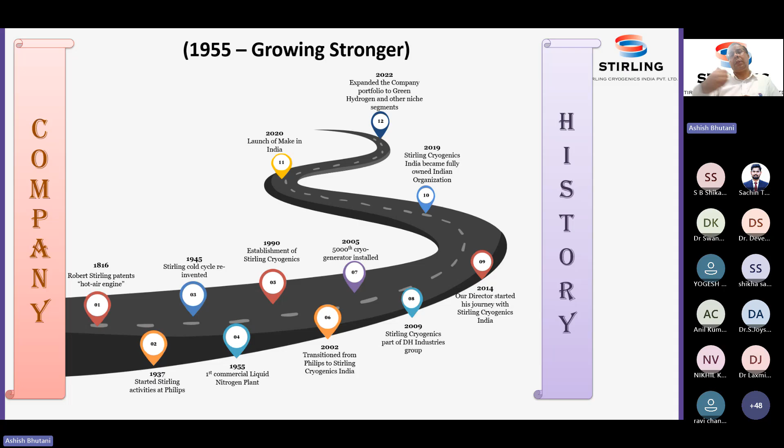Recently, Mr. Nitin Gadkari drove his first hydrogen-driven car, known as Toyota Mirai, and that very storage container was developed and fabricated by us and our principal company. That is the thing which we are proudly doing. India is still to experience a lot of transformational gear towards hydrogen, and we are at the forefront of that.

This is our one slide showing that we have 70 plus years of global legacy. We have installed more than 700 systems all over India, and we are a Make in India company - the first company that adopted this Make in India concept when it was launched in 2020.

So allow me to run a small video about Stirling.

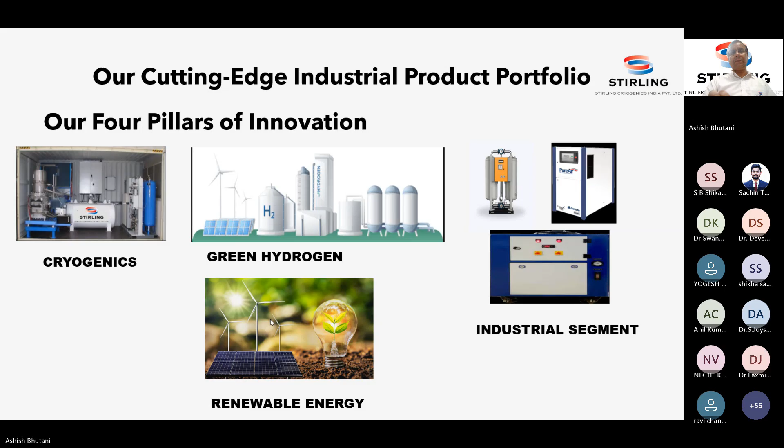So if I move on, we have a collaboration with Fabrum, which is a New Zealand-based company started in 2004. Fabrum is also a very, very decent company to work with. We were the first company to handshake when the launch of Make in India was announced, which I'm going to share in my presentation. Allow me to run a brief video on Fabrum.

Screen is visible, video is okay. The screen is visible, sir, but we can't hear the audio. Audio is not there. So can I do something with the internet?

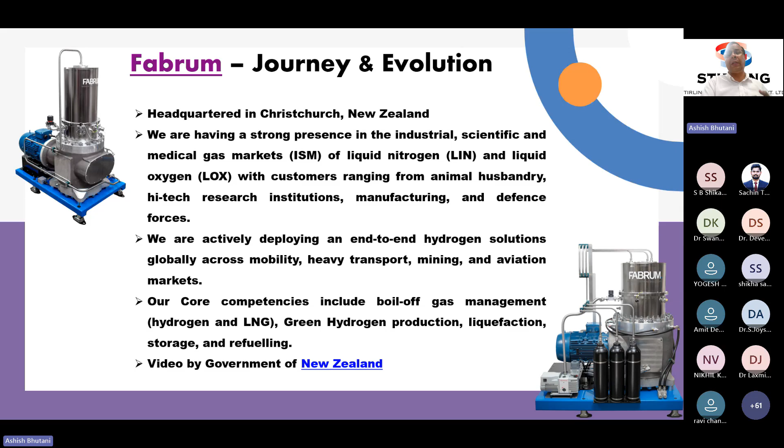Fabrum is a 21-year experienced company, and we hold a patent around our cryogenic solution. This is the only organization in the world with a dual patent on cryogenic technology and green hydrogen solutions. Our key shareholders are Fortescue, K1W1, Obayashi, and AP Ventures.

Fortescue is a big company in Australia. Their vision is that by 2030 their entire fleet of mining trucks will be converted from diesel to green hydrogen. We are actively working on that, and in fact we have put up a couple of projects with them in Australia, where we provided the concept-to-commissioning solution.

So that is what we do. And Fortescue, if I tell you in an Indian perspective, they are the Ambanis of Australia.

So this is our core competencies. We are into cryocooler, like liquid hydrogen, liquid oxygen, boil off gas management, electrolyzers, biomethane, and liquid nitrogen. So that is our cryocooler competencies we do have.

And in composites, we are into aviation, for which we have developed these kind of special containers for aviation sector. We are into heavy transport. So this is the real photograph of the project we put up in Christmas Creek in Australia, and then magnetic and superconducting applications, custom based.

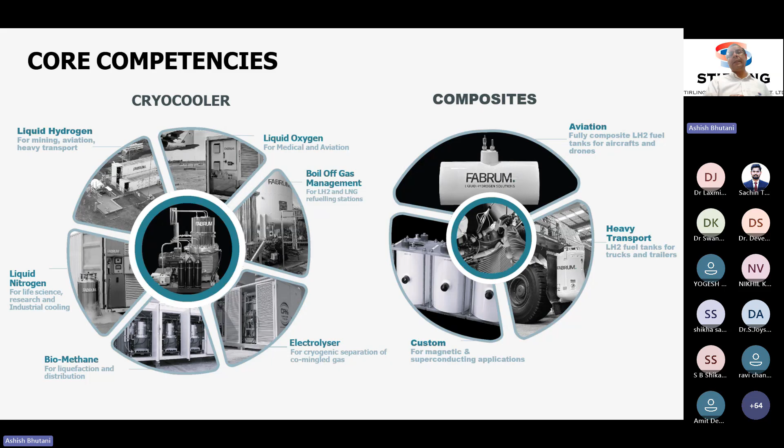So these are our main functional divisions: liquid nitrogen, liquid oxygen, liquid hydrogen, boil off gas management. Boil off gas management is also a new niche segment wherein we are putting up the project, liquefying the gas which is coming out and reducing the losses. It's basically a zero loss system.

In hydrogen refueling, we have developed 1 megawatt and 5 megawatt fuel stations. We have put up 5 projects in Australia so far.

And composites, so this is a liquid hydrogen storage, and this is a real photograph of our technical director who has actually held the hydrogen storage container in his own hand. So we have developed a very lightweight hydrogen storage container that can be used for aviation and other sectors.

So our vision and mission is very clear: we would like to be a world-class manufacturer and service provider, and we would like to be a one-stop solution for industrial and green hydrogen requirements. And mission-wise, this is what we have been doing for the last 70 years.

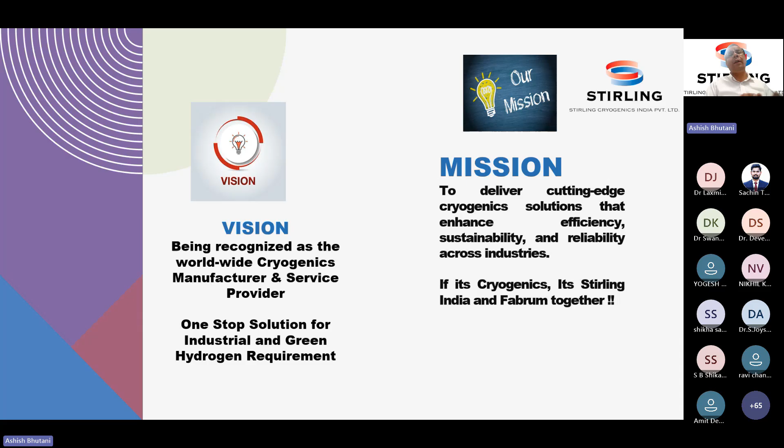If it's cryogenic, the first name that should come to mind should be Stirling India and Fabrum. So that is our mission and vision, and myself along with my entire team, we work day and night to make sure that our vision and mission is absolutely ensured.

So cryogenic solutions - our solutions go into animal husbandry. We have more than 50% of our customer base in all of India's animal husbandries.

You name any IIT, you name any NIT, we do have presence over there. State universities, central universities are our main clients, along with medical line, pharma, IVF centers, and research labs. So our cryogenic solutions go very well into these critical sectors.

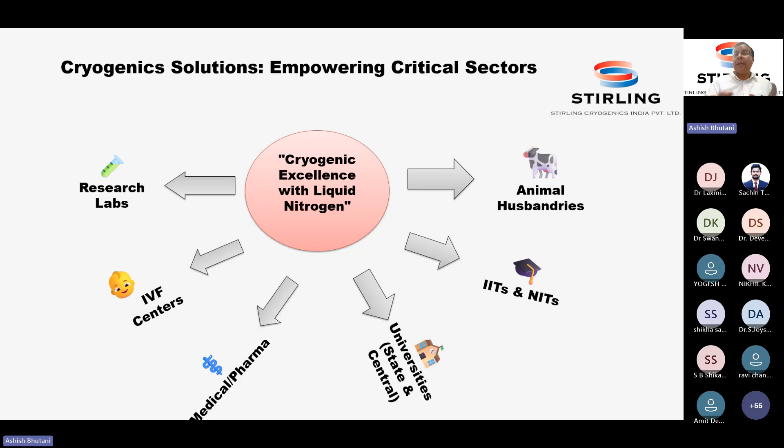And this is our product range. We are into small to mid-range products. We are developing a 1.5 liter per hour machine for which Mr.

Rahul Rangar, who is our R&D head, along with Simran Chauhan, who is also in R&D, they are working day and night to make sure this product is launched by December 2025, the new year. That product we are developing indigenously on the GM cycle, Gifford McMahon cycle, ranging from 1.5 liters per hour to 100 liters per hour.

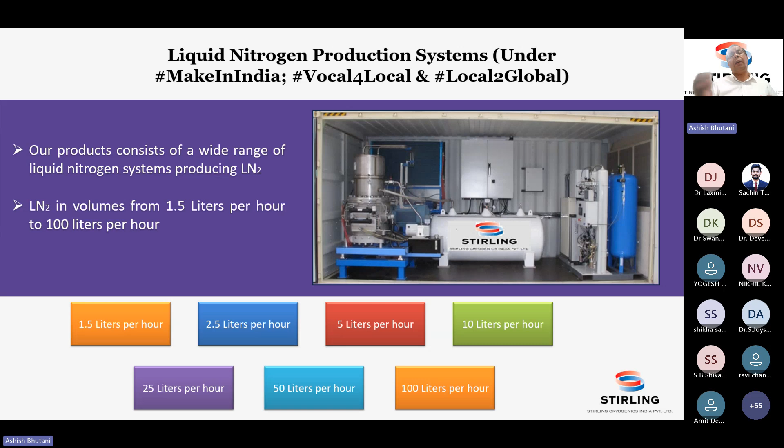That is our main customer and product range. So we have almost 750 plus plants all over India.

So this is the change we experienced way back in 2020, when the Honorable Prime Minister Modi ji launched Make in India, Vocal for Local, and Local to Global.

So we have all these air compressors, the receivers, the PSA, the voltage stabilizer, and the chillers, and the entire gas part developed by Stirling India. And with Fabrum, we have the cryocooler and panel. So these two components are getting manufactured.

So our discussions are underway with Fabrum about why not manufacture the entire system over here in India. So very soon, within the next 1 year, we will have that kind of setup in the factory wherein we will manufacture the entire system over here in India, and that is going to be a breakthrough journey in the history of cryogenics.

And these are the standards which we follow. We are 9001:2015 quality management system, 14001:2015, and 45001:2018. And we are CE certified. We are a Udyam company, and we are also registered with ZED, zero effect zero defect, which is a bronze category.

That is honored by the Ministry of Small and Medium Enterprises. So we follow the highest standard. We do not encourage or have any kind of system which doesn't work. We do rigorous R&D and rigorous testing before dispatching the system to any client.

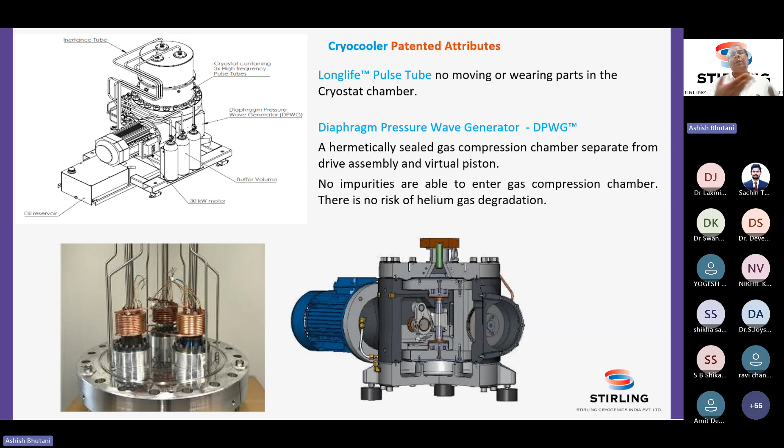By virtue of that, since there is no moving component, this has relatively longer life and higher reliability. That is what we proudly say. Once you have our product, for the next 10,000 or 12,000 hours the machine runs continuously, so you do not require any maintenance. After about 10 to 12,000 hours, only two filters need to be replaced, and the hydraulic oil in the oil reservoir needs to be replaced. This is the beauty of our technology, that is why we have written the patent, established the standard, and followed it.

This is the erstwhile technology, because I always believe continuous improvement is the life. We follow Kaizen. This was the third generation machine wherein the piston and compression took place in this compression space. Since we follow the Stirling cycle, we have similar technology, but we do not have the actual movement.

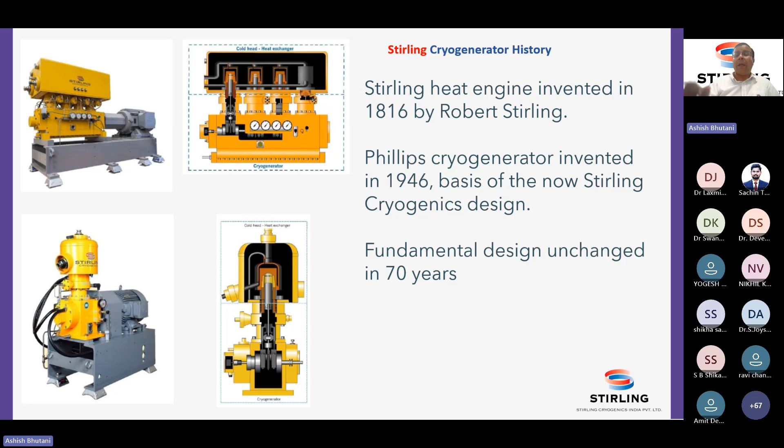We have virtual movement instead, through the diaphragm which we developed, giving longer and more reliable life to the system. So we changed it such that this machine used to need maintenance after about 6,000 hours, and now we do not require maintenance till 12,000 hours. Major maintenance used to happen at about 16,000 hours with this technology.

In this, we have experienced 40,000 hours. The patent states that major maintenance happens at about 40,000 hours. If I calculate in number of years, if the machine is installed today and running around the clock, say about 8,000 hours a year, then for the next 5 years we do not require major maintenance. That is what we have given.

When we actually tested, we tested this machine for 7 to 8 years before launching into the market. We experienced that this diaphragm has actually crossed more than 50,000 hours without failure. That is why we have been honored with these two patents.

These are the preventive maintenance schedules which we follow. The major strength of our company is the after sales service support, and we proudly take on longer warranty because we know our product and we know our team. After completion of warranty, we also enter into a long-term service contract, 3 years, 5 years, or even 10 years. Our service engineers are very well trained.

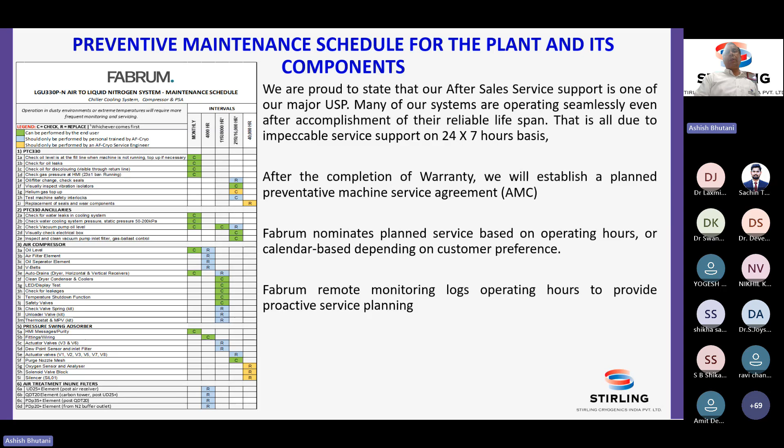Coming back, these are the projects. I have not highlighted the entire 700 plus systems. I have specifically stressed those projects which we executed after the launch of Make in India. I'm really proud and glad to work with this company, as we were the first company awarded with a product project when Make in India was launched back in 2014. So I've specifically chosen these projects which will give a lot of insight about us.

This is a project which we installed in Kargil at minus 20 degrees Celsius temperature, in Pasighat, which is about 100 kilometers from the China border, and in Ujjain. If any of you visit Ujjain next time, kindly visit our plant also, which is about 3 to 4 kilometers before the Mahakalji temple.

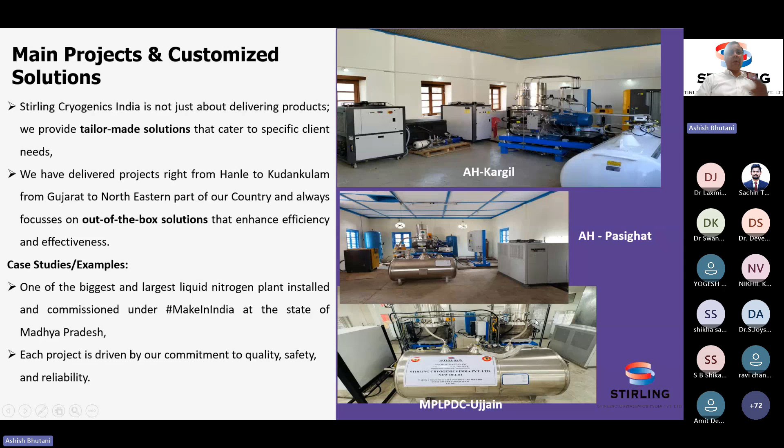This is one of the biggest projects in the entire MP, catering to the liquid nitrogen requirement till Indore. There are about seven major stations and 120 substations where this liquid nitrogen plant is fulfilling the entire requirement. This was the first project at Rajmata Vijayaraje Scindia Krishi Vishwavidyalaya, Gwalior.

The entire management was very elated and felicitated us. This was the first project in the history of cryogenics where we manufactured the system here in India, and we are still the class one supplier. From that day on, we have never looked back. We have got a couple of projects through tendering, but we always get success.

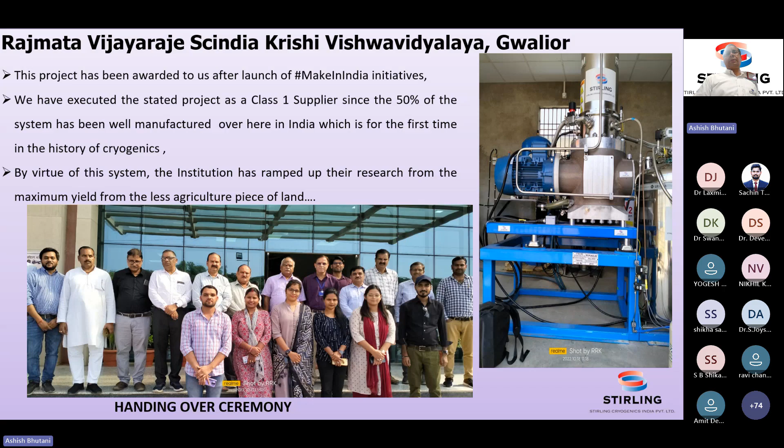This is the second project which we put up in Kargil at minus 20 degrees Celsius. This very project was published in their coffee table book when Ladakh was declared as one of the UTs, which was earlier part of Jammu and Kashmir. This plant gives about 600 liters per day production.

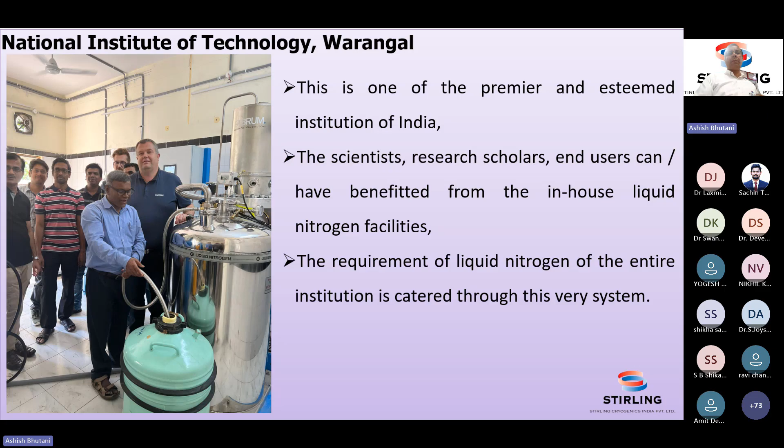That was the third project which we did in NIT Warangal. These gentlemen come over here and our team also works with them, showcasing the united spirit. This is one of the biggest projects in the entire MP, inaugurated by Honorable Chief Minister Dr. Mohan Yadav ji, installed in Mahakal, a prominent tourist place.

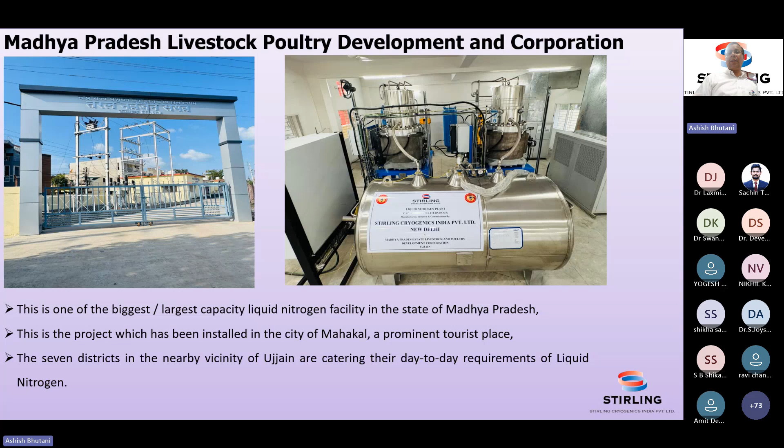This was the project we put up in Pasighat, Arunachal Pradesh, about 100 kilometers before the China border. And NIT Rourkela is what we recently put up.

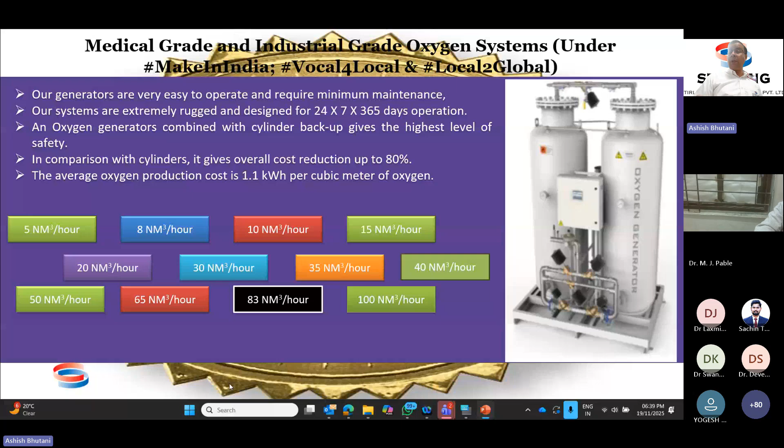These are the products for hospitals which we manufacture here in Noida. I invite all of you to visit us and visit our factory. We have products from 20 bedded hospitals to 400 bedded hospitals. And these are the industrial projects like Compair, Gardner Denver, Parker, and Vichy, which we represent on a pan-India basis.

This is mainly the topic of today, green hydrogen. The future is this, because all of us are experiencing that fossil fuels are getting depleted day by day, and the prices of petrol and diesel are increasing day by day. So the alternative solution has to be developed. That is what we are proudly doing, a lot of R&D, a lot of research, a lot of innovations, and also launching many solutions towards this green hydrogen.

All of us know there are three types of hydrogen: gray hydrogen, blue, and green. Why do we say green? Because first and foremost, our entire system operates on renewable energy. We do not use any fossil fuel or natural gas, biomethane, or anything. That is why we proudly say we produce a green hydrogen, which is basically depleting carbon content and giving carbon credit. We remove the carbon content and also produce a very clean hydrogen gas and liquefy it. That is what the future is - into transportation, chemical industries, energy and storage, and liquefaction and export.

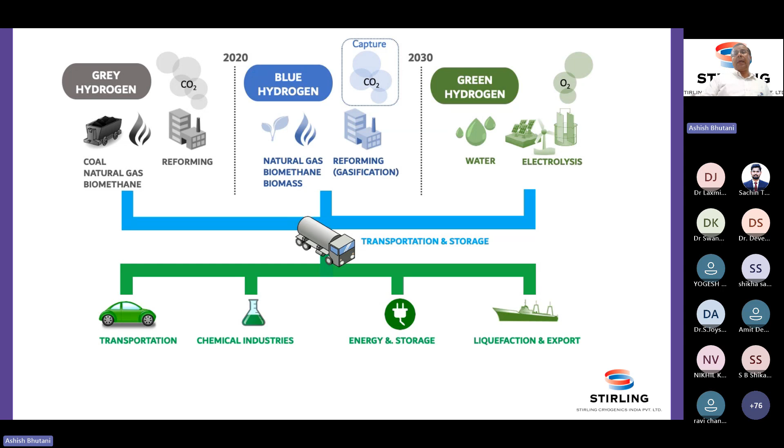All of us know we are students, and at the age of seventh or eighth class we have done a lot of practicals, wherein in one beaker or glass of water we put one cathode and one anode, and we could see with our naked eyes that the ions are getting dissociated. This is the same principle of operation which we do, but on a different scale - that was a very small scale, but now we do it on a larger scale. We have two technologies: one is proton exchange membrane, and second is membrane-free electrolysis. Proton exchange membrane technology is also good, but that is good for a smaller scale.

If I have to produce say 100 milliliter per minute to 1.35 liter per minute of green hydrogen, of liquid hydrogen, that scale is good for PEM.

That is basically proton exchange membrane, wherein there are cells which give positive polarity and negative polarity, whereas in the membrane-free electrolysis, which we have the patent also into, we are producing from 450 kg of green hydrogen to 900 kg of green hydrogen. So that is what, and these are the various R&D projects.

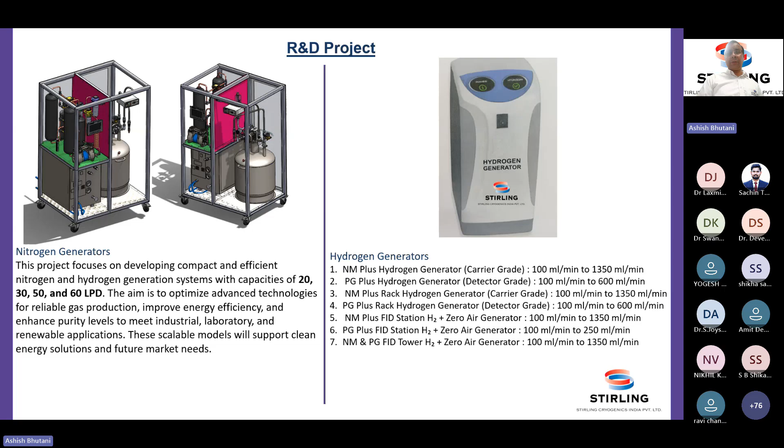And since we are all engineers, the difference between PEM and membrane-free electrolysis is very solid. First and foremost, in PEM technology, if I have to produce 450 kg of green hydrogen gas, I need 2000 parts per stack. However, in membrane-free electrolysis, I only require 400 parts per stack. So as the number of parts are less, the reliability of the system is more.

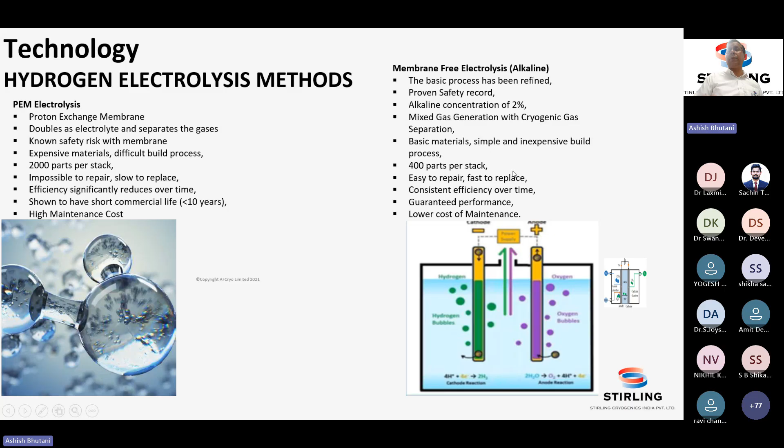The second major difference is that in PEM, we only use very clean water, distilled water and all, whereas in membrane-free electrolysis, we can use any sort of water, whether dirty or dusty or any kind, because that will be cleaned and the green hydrogen will be produced. So that is the major difference, and the cost of ownership of this system is comparatively less.

And we have two products, a 1.1 megawatt unit and a 2.2 megawatt unit. The major difference between them is only a double.

What we do is feed 4050 kg of water in a day, and out of that, 3600 kg of pure oxygen is produced, and 450 kg of green hydrogen is produced at a very high pressure, about 34 bar, and at a purity level of 99.9%.

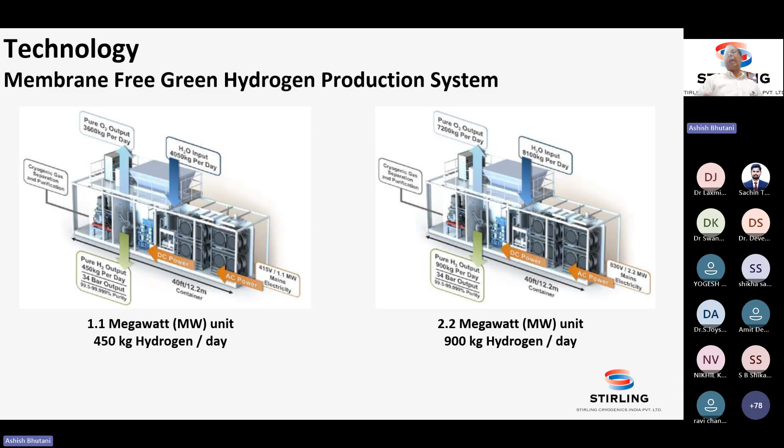Whereas in the 2.2 megawatt unit, we feed 8100 kg of water, and 7200 kg of oxygen and 900 kg of hydrogen is produced. All these systems are self-contained, into a 40 feet container, covering everything right from electrolysis, then production of hydrogen, and then liquefaction of hydrogen, all stacked into this 40 feet container.

This is the future—this is the project which we have put up in Christmas Creek, Australia, wherein we are converting all of their diesel trucks into green hydrogen driven trucks, and we have put up the electrolysis, then liquefier, then storage and all those things.

Storage of hydrogen is not an easy task. If it is not handled properly, it could turn into a hydrogen bomb as well. So what we have basically done with this technology is that every cryogenic container has to be double wall, insulated, self-insulated, with vacuum insulation in between. But in the case of hydrogen, to make sure our systems are reliable, consistent, and perform, we have developed a triple skin hydrogen container.

Even though it is triple skin—one layer, second layer, and third layer—the weight is not very high. It can be easily lifted on the lap.

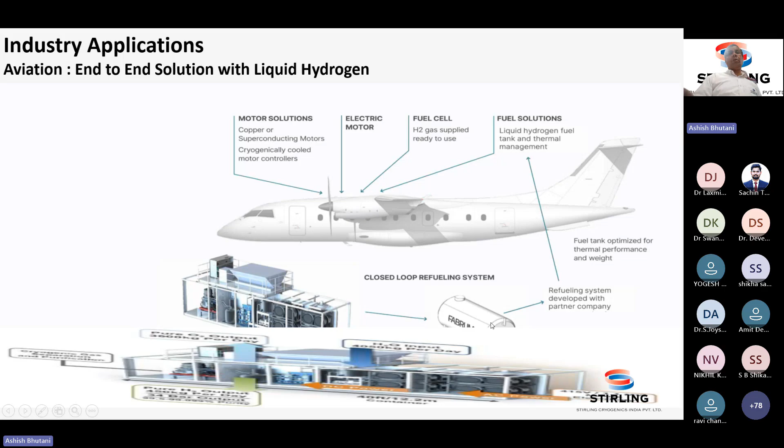And this is the real photograph for which we have done the project with the Australian Prime Minister—his private plane that is actually on green hydrogen, and for that we have given the solution. We have given the hydrogen storage solution to the Australian Prime Minister. And also into the chase boat.

Sorry, this slide is not...

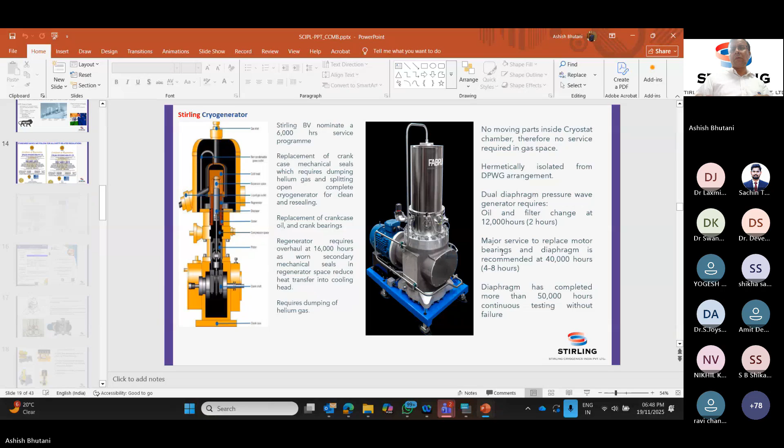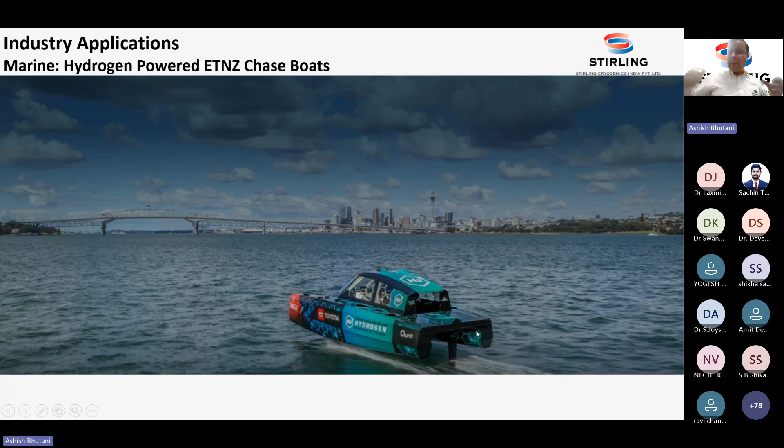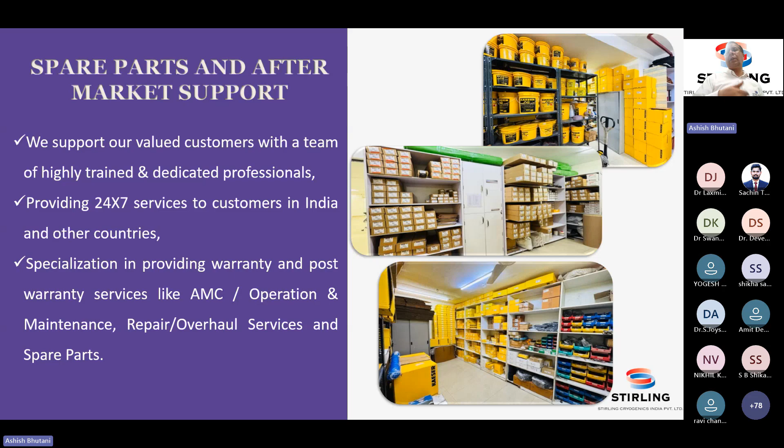So these are the spare parts and after-sales service. Since we also operate on a pan-India basis for various private customers, they need 24/7 support. So we have a fleet of spare parts available around the clock at our factory and at strategic locations within the country, so that our engineers can render the quickest possible service support.

So our idea is very clear: we want to expand market share, develop more solutions under the Make in India initiative, and focus on sustainability and green energy. We want to strengthen our after-sales service. I can always say that if we are getting back-to-back repeat orders, it's all because of the impeccable service support which we render.

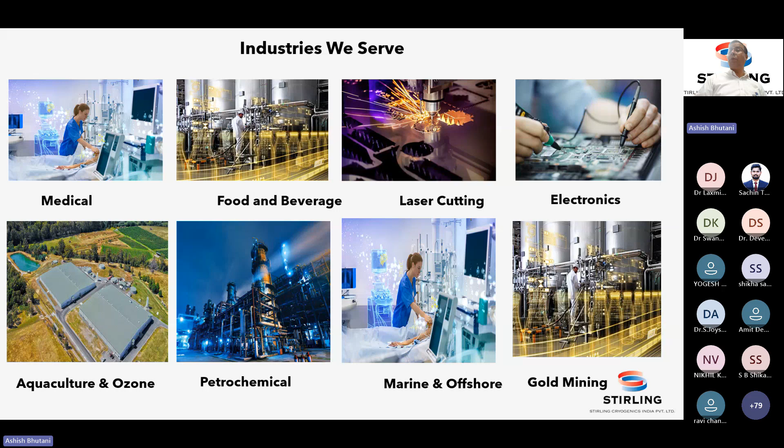So that's all about Sterling. Now I open the forum for the audience to ask any questions, please.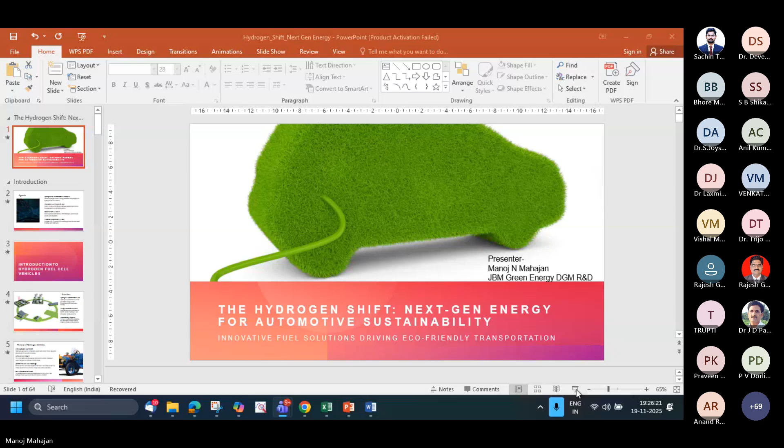Coming to the topic, the hydrogen shift, the next gen energy for automotive sustainability.

So today's agenda, what I will be more focusing on is hydrogen's role in automotive and its principles. We'll discuss hydrogen's role, how the energy transition has happened from fossil fuel to renewable energy, and basic principles of hydrogen fuel cell vehicles.

Then I will more focus on production and development cycle, because I think this week is complete for hydrogen's different topics. Some speakers will be more focusing on hydrogen's production process, and some might have already spoken on its storage and safety. So my focus will be on hydrogen, how it is playing a role in automotive and how the automotive industry is looking at this as a next gen fuel. That's what I'll be focusing on more.

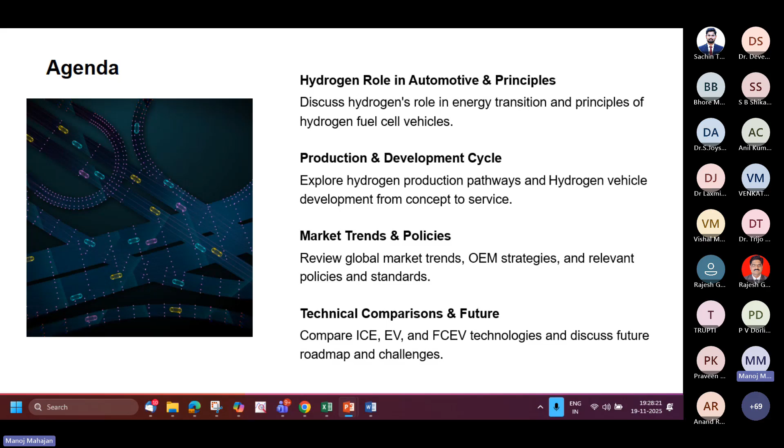I will talk about how the product development cycle happens from concept to service. Then we'll see market trends and policies - what policies are globally already led, and for the Indian market. Then what are the OEM strategies and relevant policies and standards, their requirements. We'll also discuss the basic comparison of ICE, EV and fuel cell EVs, what are the basic differences, pros and cons of both technologies, and their roadmaps and challenges.

Coming to the transition, we all know earlier, if you see the last decade - 10 years back or 20 years back - at that time we never heard that there would be electric vehicles. We heard about the development, but only at the concept level. We never saw anything realistic on the roads, productionized, or any brand launching EVs on Indian roads. So now how is the transition happening?

Earlier it was conventional fossil fuel, where energy was generated from petrol, diesel, and also with the help of coal and nuclear power plants. But now if you see how the government is also focusing on renewable energy and how the thrust is coming, pushing by some compulsion and other factors - there are multiple interesting things that I will put as points, a glance at what is happening in the current automotive industry.

Hydrogen is positioned as a next generation energy after EV, and development is happening parallel to EV. But because of some constraints, its development is slower. Some OEMs have already launched, but because of storage infrastructure and the ultimate ecosystem needed, that complete ecosystem will be formed very soon, and we will see very good numbers in the automotive industry by 2030.

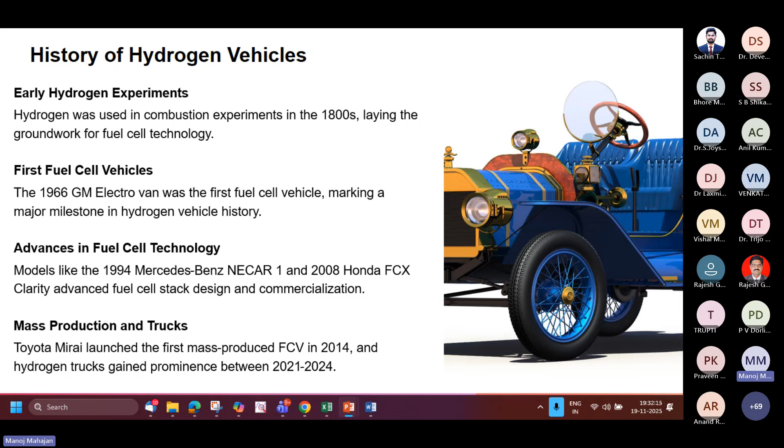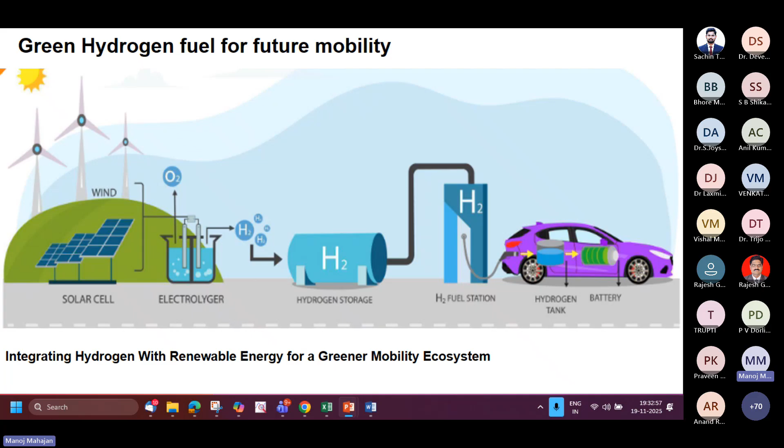This is basic - we all know green hydrogen, where the hydrogen gets generated by renewable energy only, like solar or wind, from where the energy gets generated. Then with the electrolyzer, the hydrogen and oxygen get separated, and hydrogen gets formed, then it goes to storage at fuel stations, and at last is available to us as customers for automotive use. So this is a simple line diagram I've shown here.

These are the hydrogen production pathways. At present we are more focusing on the green fuel only, which is green hydrogen. Gray can be produced from natural gas, but CO2 emission is high, so that doesn't make sense toward our green emission objective - it's cheap but high pollution. Blue, using natural gas plus CCS, has low CO2 emission, but still the objective is not getting served. The third one, green, is where all the efforts are being applied, and by 2030 the ecosystem will be purely for this green hydrogen. Then pink, from electrolysis with nuclear, has less emission, but it's still not viable.

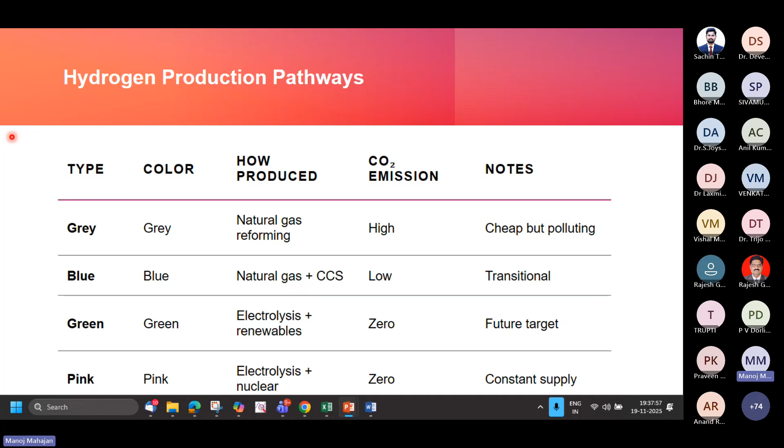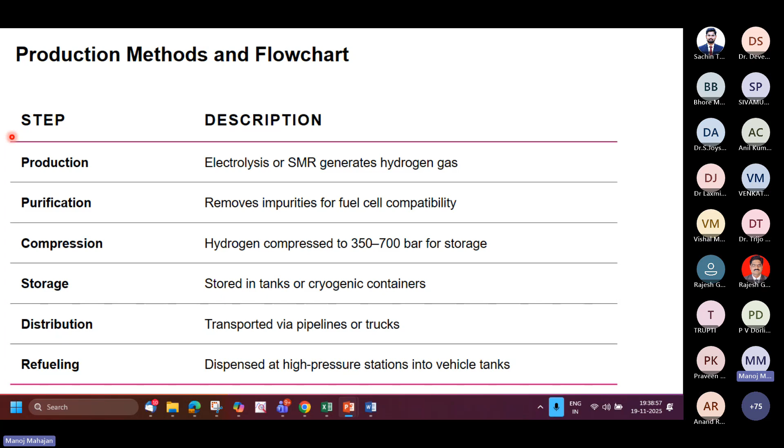So these are the simple steps of what happens during production, the electrolysis process. SMR generates hydrogen gas, then purification, where impurities need to be separated. Then compression, where it needs to be compressed at 350 to 700 bar. Then storage, stored in tanks at cryogenic temperature. Distribution happens via vessels on trucks, vessels on ships, and some pipelines, which are already in pilot projects. And refilling dispenses at high pressure stations into vehicles - this infrastructure in India is very less, but some countries already have good numbers of refilling stations, and India is also targeting good numbers, working with NTPC and other government agencies.

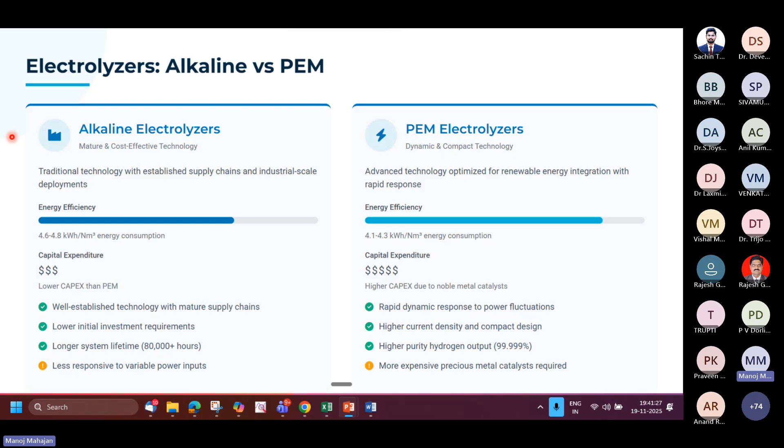So this is the difference between alkaline and PEM. Alkaline electrolyzers are conventional and cost effective, but in terms of energy efficiency, this production consumes 4.6 to 4.8 kilowatt hour per normal meter cube, whereas PEM consumes 4.1 to 4.3 kilowatt hour per normal meter cube. Capital expenditure is higher in PEM, lower in the conventional alkaline method. Alkaline is well-established, matured technology, with low initial investment, longer system lifetime, but less responsive to variable power inputs. PEM has higher capex due to noble metal catalysts which are very high in cost, but it has rapid dynamic response to power fluctuation, higher current density, compact design, and higher purity hydrogen output close to 99.999 purity - though more expensive, and precious metal is needed.

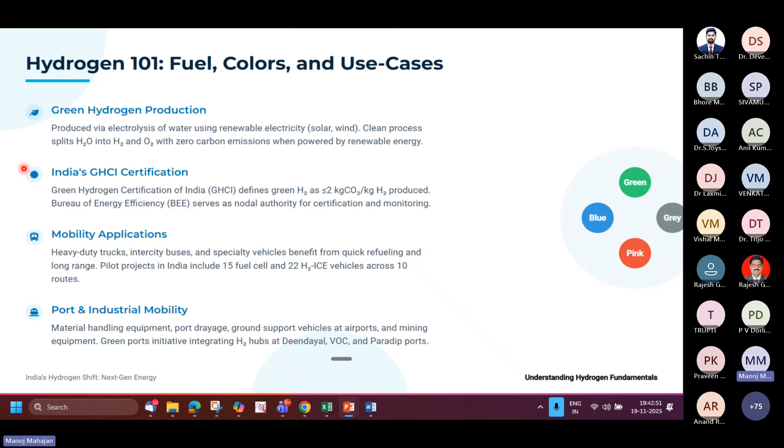Mobility applications like heavy-duty trucks, intercity buses, and specialty vehicles benefit from quick refilling and long range - pilot projects in India that I've taken as a case study, which I will also show in upcoming slides, where 15 fuel cells and 22 H2 ICE engines across 10 routes are running. These projects are already running in the north at Ladakh. Then there's port and industrial mobility - material handling equipment, port drayage, ground support vehicles at airports, and mining equipment. The Green Ports Initiative is integrating H2 hubs at Deendayal, VOC, and Paradip ports.

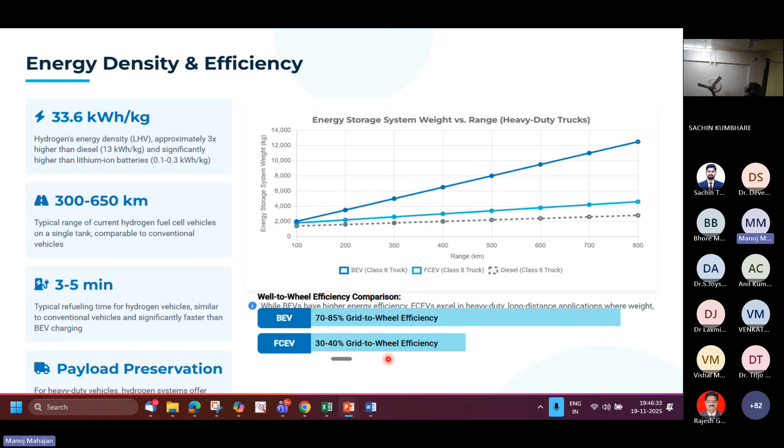In this graph, if you see the energy density we spoke about, for BEV, FCEV, and diesel class, it is much higher for hydrogen. And if you see efficiency, it is higher than petrol and diesel, but still lesser than BEV.

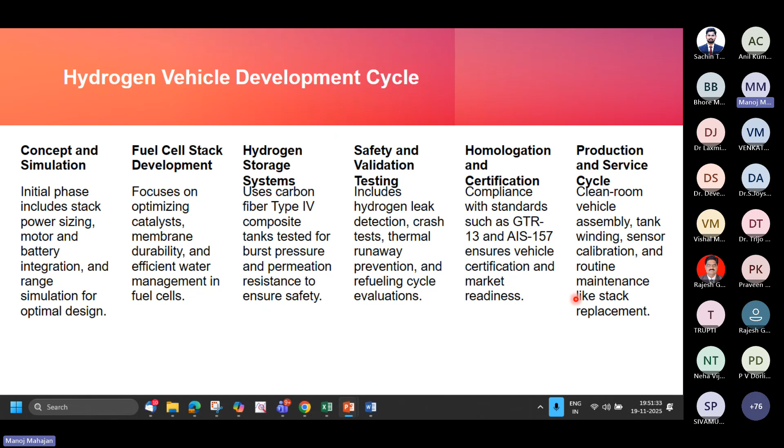These are the safety aspects, because automotive needs to comply with functional safety requirements, where for each and every system, the safety needs to be proved to government bodies or agencies like ARAI, when you are launching your product in the European market or the American market, where norms become very stringent and you need to comply with or undergo very rigorous testing.

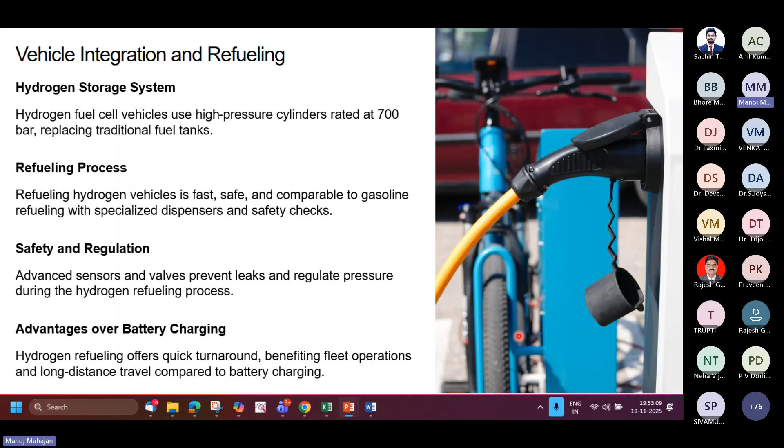Advantage over battery charging - as we said, it's quick with hydrogen. We are looking at commercial fleet operations where long distance travel can be done with this, where battery has that limitation at present. EV vehicles have limitations.

Then durability, where we take this vehicle on a torture track. That is also one of the very abuse testing, where our proto vehicle goes on those torture tracks, and very high G level vehicles are traveled or run for multiple cycles to check how reliable and durable our product is.

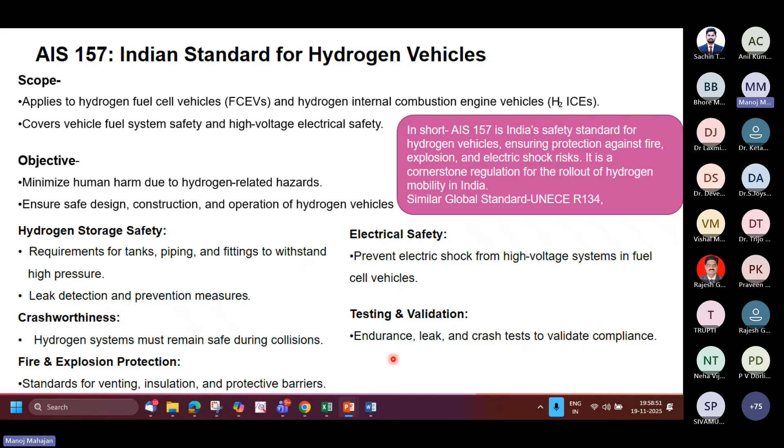Then competency and capability is also one of the factors, where technology and all these things need to be adopted and implemented. Then again, need to consider future demand and growth, because any technology, when it needs to be brought in...

...in a realistic way, government plays a very important role, because initially they need to give subsidies, since no OEM or manufacturer will do charity. For anything to happen, there should be government support and subsidy, only then does it become a commercially viable product. When we talk about scalability, we might have heard long back about the concept of a vehicle running on hydrogen with a certain range, but unless the ecosystem is ready, it will never become a commercially viable product.

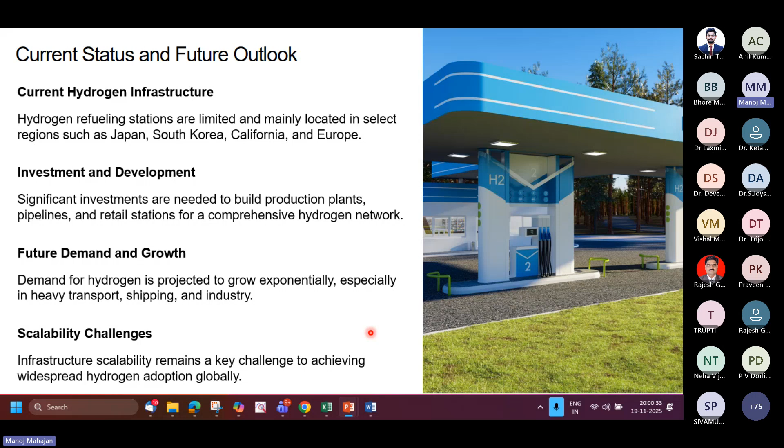So these challenges are still there, but because of government vision, those will be achieved. Like, why did development take time? Because, as I said, at the concept level, long years back, even when Auto Expo used to happen, we saw so many top OEMs.

Tata also demonstrated their bus, but why has it not come to the real market or into production? So first, as I said, it's a technological complexity. Hydrogen vehicle development is slowed because of its complex technology.

Now the technology is on board, but again, to develop that ecosystem, we need to wait, due to high cost of infrastructure from production to storage, and very limited fueling stations, which delayed this scalability. Then market and demand, low initial demand, market uncertainties. That's why the government is taking initiative.

Then recent advancements like green hydrogen production, if that comes, then it will really be a green emission product on the road or in our market.

So how are the global strategy and standards? If you see the numbers I was mentioning, the global market landscape shows hydrogen vehicle adoption has already happened. Hydrogen vehicle population includes 60,000 cars, out of that close to 12,000 buses, 8,000 trucks, and the major chunk, 50,000, are forklifts, as of 2025.

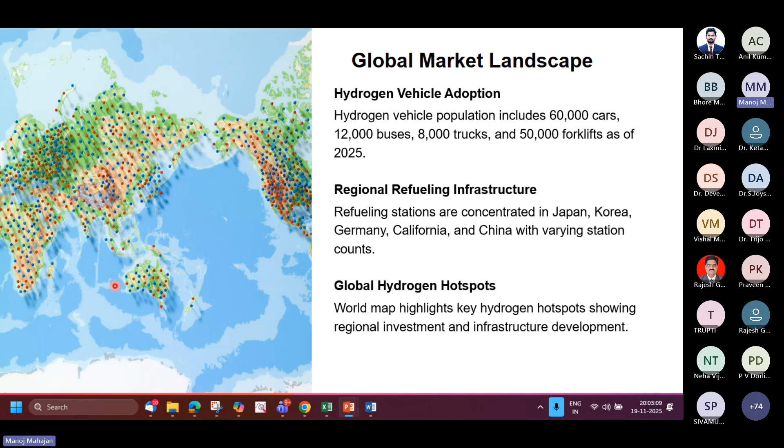So global energy transition, if you see the production in million tons, again it's demand versus production which we need to deliver. In this y-axis, million tons - at 2020, what was the demand, by which way: refining, chemical production, mobility, transport, power heat, and new industrial application.

Different applications - how this has been done and how it is estimated. If you see for mobility transport, by 2030 major chunk will be for mobility, for which the hydrogen will be getting produced and will be getting utilized for the mobility application.

97 metric ton global hydrogen demand in 2023, growing by 2.5% from 2022. Then clean hydrogen capacity growth from 2020 to 2030 expected from 7 to 48.

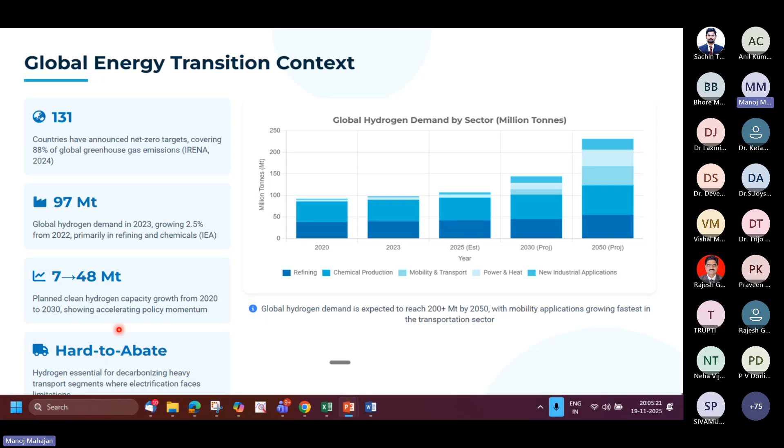Regional leaders: as we know, Japan, Korea, and China are already dominating or ahead, where European and US are also putting in good development, particularly heavy duty vehicle pilots. India again is at a very beginning stage, but definitely the projects which are running at present, by 2030 we will be having good numbers on the road.

Like Japan and Korea, which is a very matured market, where leading passenger fuel cell EV adoption has already happened because of government subsidies and all - passenger vehicles like Toyota Mirai and Hyundai Nexo. With Mirai, in India also some pilot projects are happening. Very soon we will be having some good news from this.

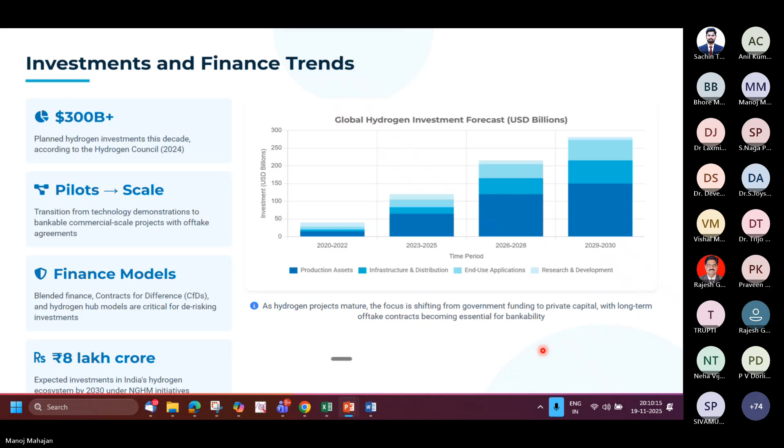So hydrogen up to 2050 - this is 2025, which we call the early adoption phase, where hydrogen is preliminarily used in refining and chemical industry, very limited for mobility purpose. By 2030, because of government vision, mobility will scale up - heavy duty trucks, fleet vehicles will be getting deployed, and hydrogen cost will also reach $2 per kg at that time.

At present cost is very high, somewhere 250 to 500. Green fuel is very high, 500 to 600 rupees per kg. But by 2030, cost will also go drastically down.

Then by 2040 it will be transport expansion - very widespread adoption will happen. Rail, shipping, aviation sectors will also take charge, and production will exceed 100 metric tons globally with an integrated distribution network across major economies.

Then by 2050, it will be a very mature hydrogen economy where hydrogen reaches around 7% of final energy demand with 200 plus metric ton production capacity, fully integrated into the energy system with competitive economics driven by scale production and technology maturity. Cost decline drivers toward 2050.

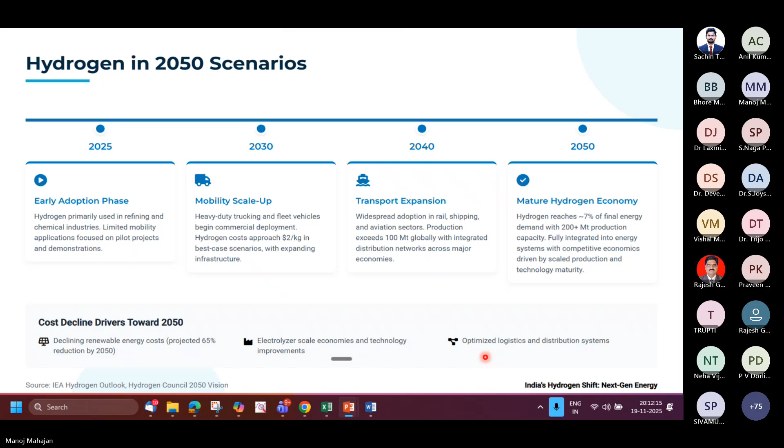Market impact and adoption. Hydrogen's market and role: hydrogen fuel cells reduce fossil fuel dependency that everyone wants. Then industry investment—automakers and governments are investing very heavily, like Reliance investing huge money for this development. Future innovation and R&D also get huge investment, because advances in solid state hydrogen storage and advanced materials will improve safety and efficiency. Renewable energy integration is the ultimate aim, to integrate with renewable energy, because our goal is green hydrogen to be used—then only it's a zero emission affair.

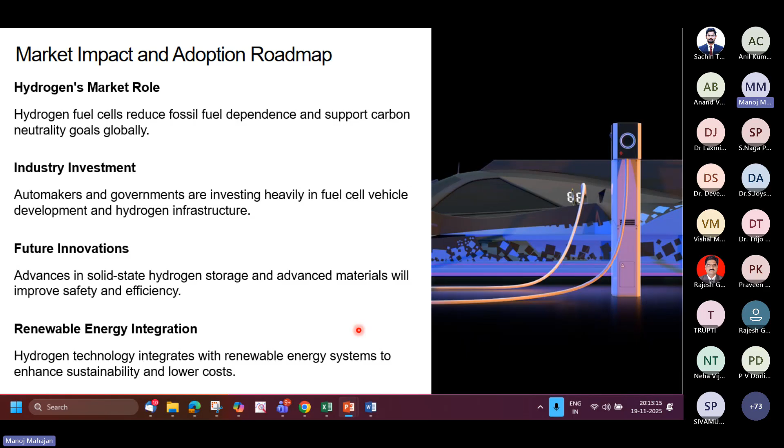Safety and environmental benefits: hydrogen vehicles emit only water vapor, with significant reduction in pollution and greenhouse gases during operation. Renewable hydrogen production, like green hydrogen produced from renewable sources, has nearly zero life cycle emissions, promoting sustainable energy solutions. Safety design features, as I said, the technology is also evolving where robust tank design and leak detection will be very robust. Reliability related to safety will be ensured, and at present storage and handling is the challenge, but that is already being taken care of, and very soon when it comes to production or SOP, it will definitely be a safe product to the customer or end user.

Technology advances are continuously happening—advancement in sensors and material enhances safety standards, because weight is most important when we talk about automotive. You want more mileage, so you need to reduce weight. But to get more mileage, you also need more fuel, so it's always contradictory. To balance this, you need to reduce the weight of the battery or the vessels or the hydrogen storage tank. If that happens, we will definitely get good efficiency and good range from the product.

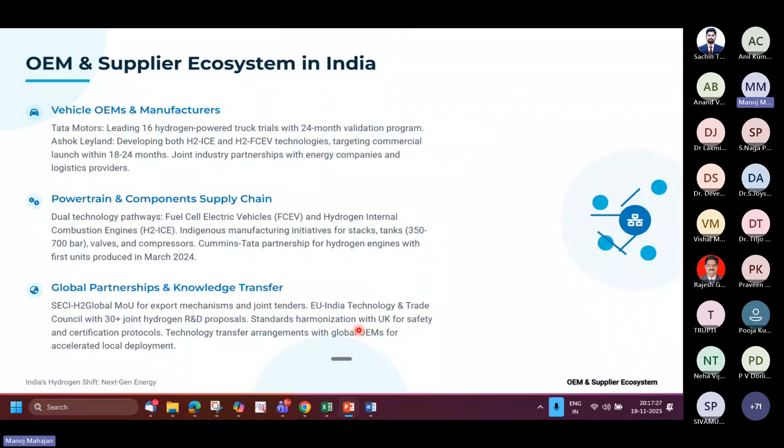On global partnerships and knowledge transfer, there's an MOU between SECI and H2 Global for export mechanisms and joint tenders, because of India and Europe's Technology and Trade Council, with 30 plus joint hydrogen R&D proposals already in place. Standards are being harmonized with the UK for safety and certification protocols. Technology transfer arrangements with global OEMs play a very main role here, because competency and technology transfer is still key—our top OEMs have already done this. Some things are confidential, but yes, that has happened, and with that the development has happened or is happening.

As a case study, Tata Motors' trial is part of India's National Green Hydrogen Mission (NGHM). Both fuel cell and hydrogen ICE technology are being tested in Leh Ladakh, with 16 hydrogen powered vehicles involved, in a 24 month plan where very rigorous validation is happening as per real world duty cycles. Because the real scenario is different—a vehicle is designed for X payload, but in India you will always find overload, whether it's a passenger vehicle or a commercial vehicle. So as per RWUP, real world usage pattern, the testing is happening to establish a total cost of ownership benchmark compared to diesel equivalents.

So back to back vehicles are getting driven to check performance and cost benefit, optimize hydrogen refilling infrastructure, operation protocol. Here it is green hydrogen they are using, because solar plant from that energy is getting generated, and that is getting converted into green hydrogen.

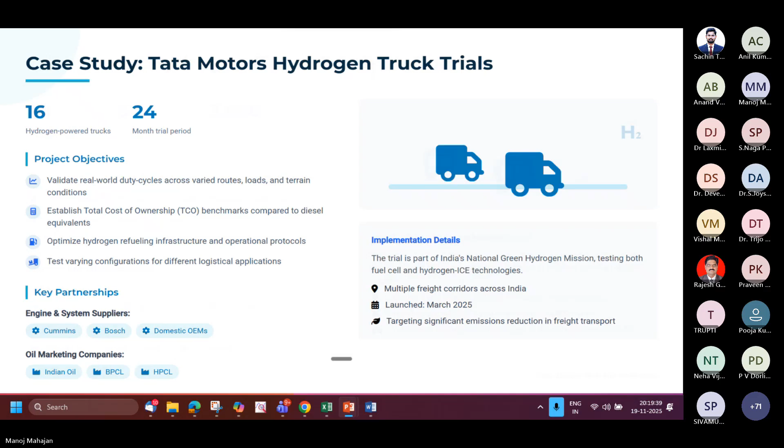So this is again, say, Leh Ladakh, first green hydrogen refilling station, just before I mentioned, 80 kg per day, at altitude of 3,650 meters. 37 vehicles, out of that 15 are fuel cell, 22 are hydrogen ICE vehicles, and 9 stations are built to support this activity. 10 routes are identified because identifying different routes is very simple.

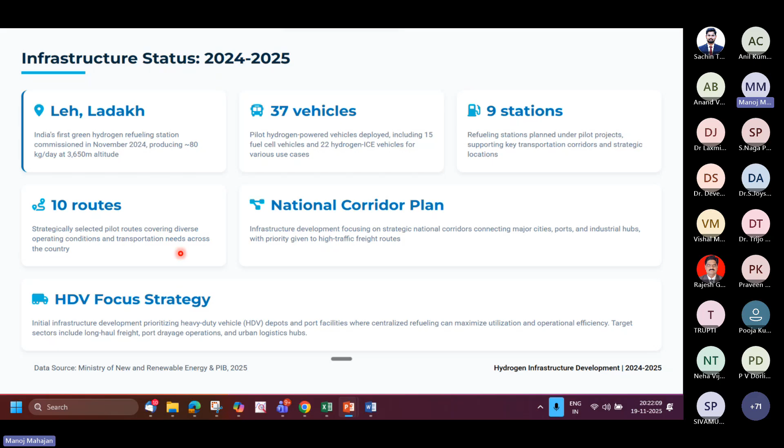National corridor plan, infrastructure development focusing on the strategic national corridor connecting major cities, ports, industrial hubs, with priority given to high traffic freight routes. HDV focus strategy, initial infrastructure development prioritizing, as I said always, heavy duty vehicles will be the first focus, and for port facilities where centralized refueling can be maximized utilization, operational efficiency.

Key players and partnerships like Tata Motors, which is already leading a landmark. Very long back, the company developed 16 hydrogen powered trucks with varying configuration, different duty cycles, 24 months timeline of comprehensive performance, which I said rigorous validation they are doing already.

Similarly, Ashok Leyland with hydrogen ICE vehicles and FCVs also, launch plan in 2027. NTPC established India's first green hydrogen fuel station at Leh only, running 5 intra-city FCEV buses and demonstrating hydrogen viability in extreme conditions. Public-private ecosystem where SECI is managing green hydrogen tenders, IOC and Reliance developing the hydrogen value chain, Port Authority establishing green hydrogen hub with private partners like Sembcorp.

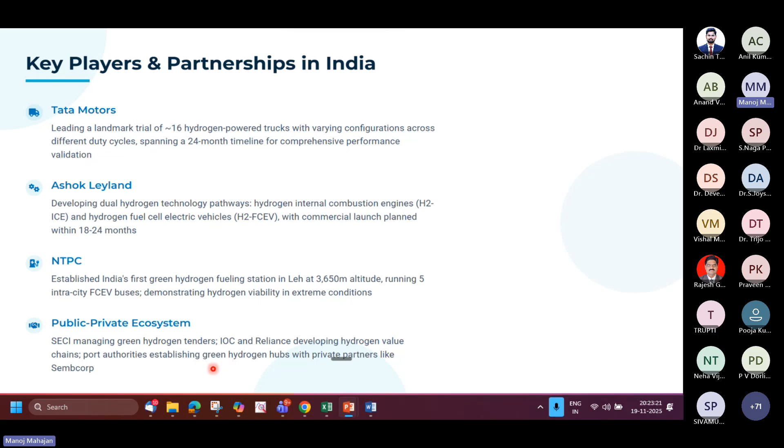Now, just global OEMs, how their strategies are, like Toyota's hydrogen innovation. Toyota, they are very advanced, far ahead in technology. Hydrogen with second generation Mirai already on the road, and exploring hydrogen combustion engine for motorsports.

Hyundai hydrogen trucks like Xcient trucks lead globally, with over 1600 units, which is very good numbers. Upcoming third generation fuel cell system by 2028. So it's a technology which is, we say, always evolving. So generation 2, 3 will be there.

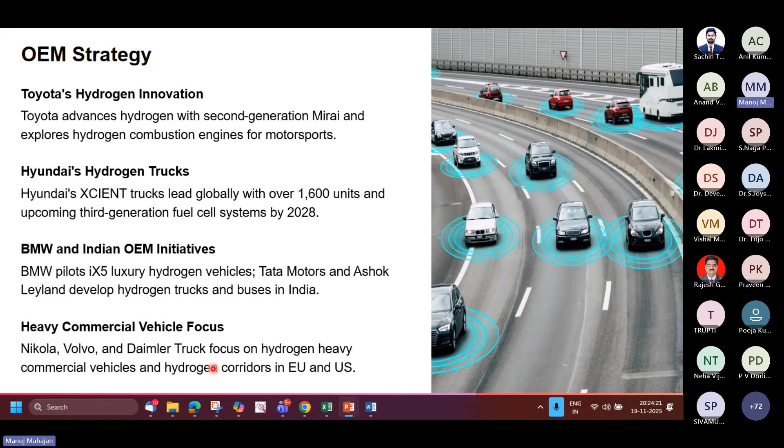So BMW and Indian OEMs like BMW Pilot iX5, a luxury hydrogen vehicle, Tata Motors and Ashok Leyland developing hydrogen trucks and buses in India. Heavy commercial vehicles like Nikola, Volvo, Daimler Truck focus on hydrogen heavy commercial vehicles, hydrogen corridors in Europe and US.

Policies and standards. So like India's green hydrogen mission, which the government has already targeted for 2030. India targets 5 mega metric ton green hydrogen production, which is very good numbers, for which government has already assigned the fund, and the green hydrogen target is to make Gujarat also having a very big chunk of that.

Then global hydrogen roadmaps, like countries Japan, Europe, US, and China, have ambitious hydrogen strategies focusing on vehicles, infrastructure, and logistics.

Hydrogen standards, key international standards such as ISO and SAE ensure safety and interoperability in hydrogen technology. Interoperability is nothing but the user taking his vehicle to different stations. So initially also I showed you there is standard requirement by SAE, like what type of connector the manufacturer should use, because it's an ecosystem. So any vehicle going to any station should be compatible with their nozzle. So that standardization has already been considered in design, and accordingly OEMs are designing their products.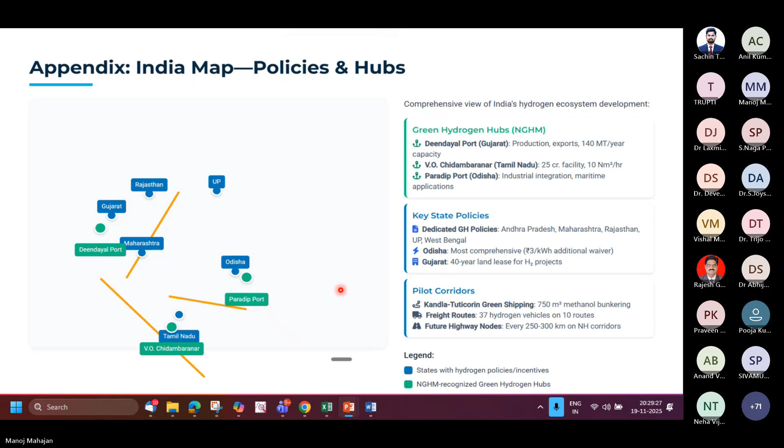This is a basic comparison I have shown here - basic but interesting - ICE versus EV versus hydrogen. Here you can see energy content: hydrogen is very high, close to 120 to 140 megajoule per kg, the energy content, which is very far high as compared to others. So hydrogen has the highest energy density. Vehicle weight consideration - EV batteries weigh significantly more than hydrogen tanks. This is also one of the factors where for high commercial vehicles, putting batteries is a challenge because of energy density to meet the high range. So hydrogen will be one of the best options.

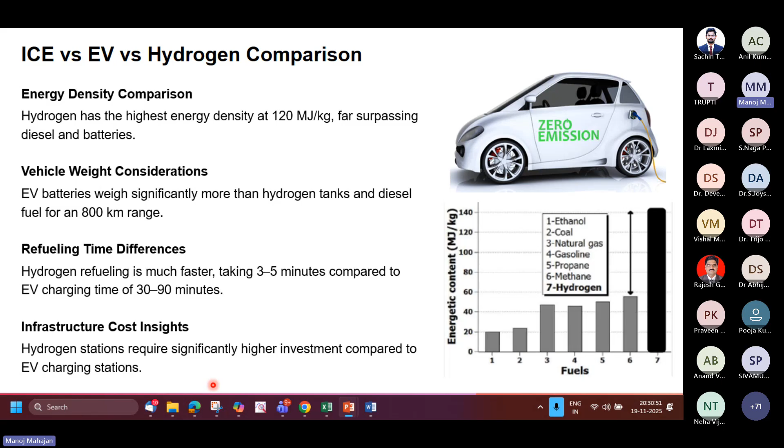Refilling time - EV doesn't make sense where the user needs to wait for 45 minutes, 90 minutes. Normal charge takes 5 hours, 6 hours. So that constraint will be getting eliminated by hydrogen. Infrastructure cost - hydrogen stations require significantly higher investment, for which government is supporting, so it will get developed soon.

Then again, this is a basic comparison of hydrogen fuel cell and battery electric vehicles. Source is gas here, storage here is battery - it can be NMC or LFP. Refilling time is just 3 to 5 minutes here, while it takes 30 minutes to several hours there - normal charge takes 5 hours to 8 hours also. Range is very huge for hydrogen, like 500 to 700, while here it is limited to 200 to 400.

There are certain other vehicles which have more range, but costs are such that the user cannot afford them. So being commercially viable or value for money when bringing into the market is always a big challenge. Infrastructure-wise, we need hydrogen fueling stations, versus charging stations which are getting installed at public locations, malls, and you can find at petrol stations also. Then emission - here the byproduct is only water vapor, here nothing.

So the benefit again - hydrogen's high density, we already spoke about it, making them ideal for applications requiring high torque and strong performance because it's an electric motor. You can get high torque - 100% torque will be available from 0 RPM itself.

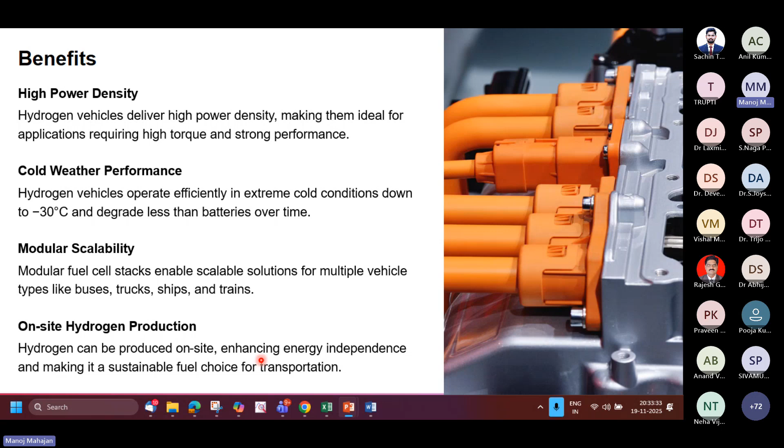So modular scalability - fuel cell stacks enable scalable solutions for multiple vehicles like big buses, trucks, ships, and trains. On-site hydrogen production - wherever you have your renewable energy, hydrogen can be produced on site. That's how the ecosystem will work - energy will be getting generated by renewables in terms of solar or wind, and near that same place, the hydrogen will get produced and then transported.

Now we'll talk about the challenges and all. Sorry, just a moment.

Okay, so we talk about the pros and cons, but the disadvantages, the cons, like high platinum cost. It is very high in cost, around...

40% cost takes place for fuel cells, around 40 to 60%. Fuel cells require platinum, which significantly increases the cost. Then there's leakage risk.

We require very robust tanks. Again, tank cost is also very high, 15 to 20%, sometimes it goes up to 25% also.

Like expensive electrolyzers for hydrogen production. Then purity is again one of the topics, how it is getting produced. Then transportation issues.

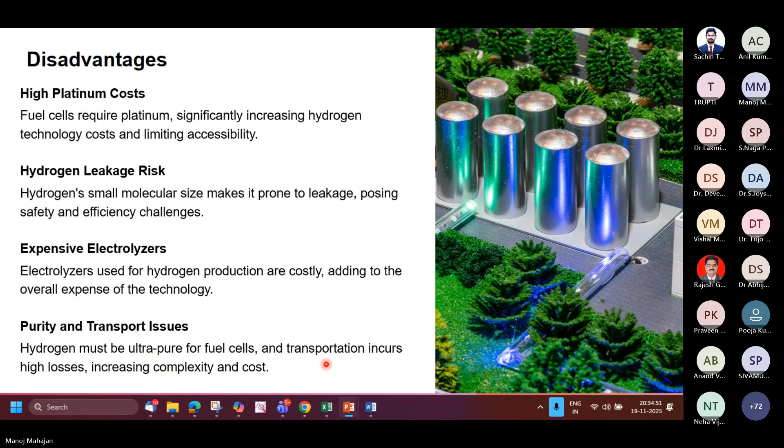Yeah, there were some incidents which happened, which also caused delays in bringing or launching hydrogen vehicles in the market.

In 2024, in the US, a lab explosion happened, which was again a setback for this development. Hydrogen incidents in Norway, Korea, and the US reveal critical safety issues.

From here, so how this is critical, safety critical - from that, the development again started, and OEMs worked on how we can give a very robust product to the market.

So safety protocol improvements happened, like incidents led to redesign of pressure relief devices, sensing devices like leak sensors and seals, and shell quality, impacting safety standards.

See, standards are also dynamic. Based on the input, standards are getting amended and becoming stringent to have a very reliable and safe product for the customer.

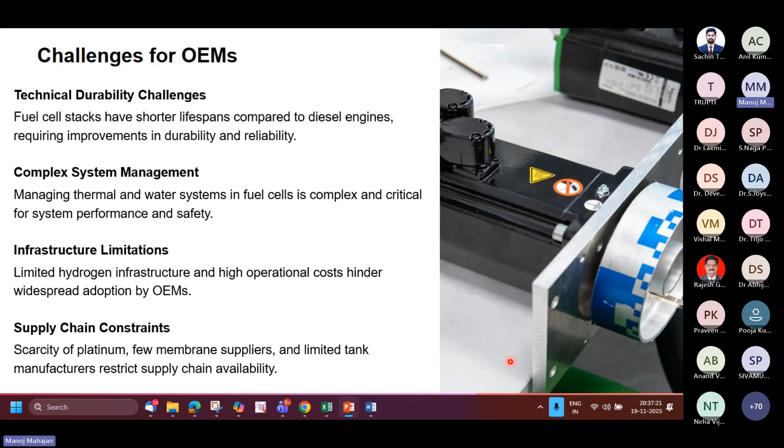But to meet the 2030 plan, that is also happening aggressively. Environmental and market impact - this is like emission reduction benefit.

Green hydrogen reduces life cycle emissions by 70-90%, eliminating harmful NOx and SOx and particulate emissions. Main important point here is job creation. I have put one slide also, which is interesting definitely.

How this green hydrogen supports job growth, how opportunities are there, like electrolyzer manufacturing, tank supply, fueling stations. Ultimately it's an ecosystem, so everywhere we will require expertise.

Hydrogen vehicle market growth - the hydrogen vehicle market is expected to reach $70 to 100 billion by 2030, with heavy duty trucks growing at 35% CAGR.

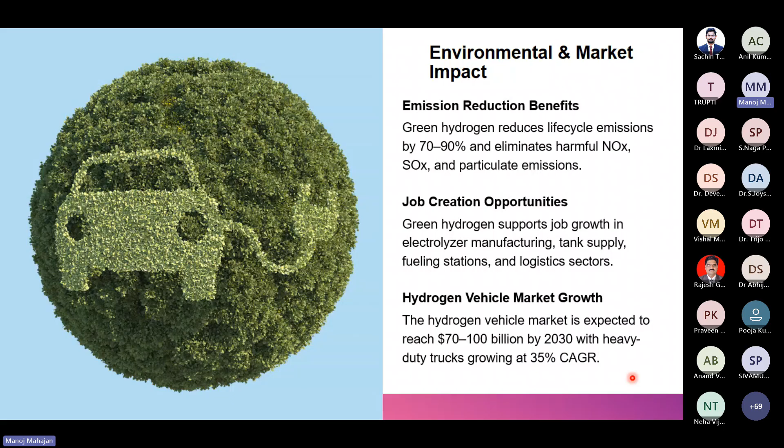Okay, customer usage and benefits - superior driving experience. If you drive a hydrogen fuel cell vehicle, it's like an EV. There will not be noise.

No vibration, no noise, instant torque, as it's an electric motor, 100% torque is available, very smooth, ideal for long trips, not like EVs - no range anxiety.

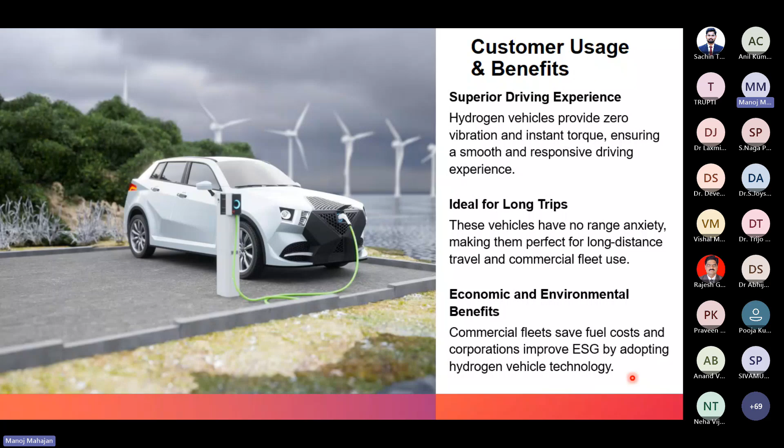Then economical and environmental benefits, commercial fleets save fuel cost. Here we have captured some basic technical issues like storage - to store at such high pressure requires very expensive shells.

Then fuel cell durability is also one of the issues, because it degrades over time, so very high cost is involved. Fuel cell stacks use precious metals like platinum, and refueling infrastructure also requires very high cost infrastructure.

Energy efficiency - very few hydrogen refueling stations worldwide, costly infrastructure. Safety concern - hydrogen is highly flammable and leaks easily because of high pressure.

Cold start and environmental conditions can be a struggle, but the validation which is happening has proven accordingly. So this may not be the showstopper or bottleneck.

So cost analysis - like fuel cell stacks, as I mentioned, 40% of the vehicle cost is the cell stack, tank close to 25%, and other components.

So you can imagine such a high cost is this fuel cell stack and the tank itself. Then hydrogen cost, if you see in India, gray is very less because it's from fossil fuel, 200 to 250, blue is 320 to 350.

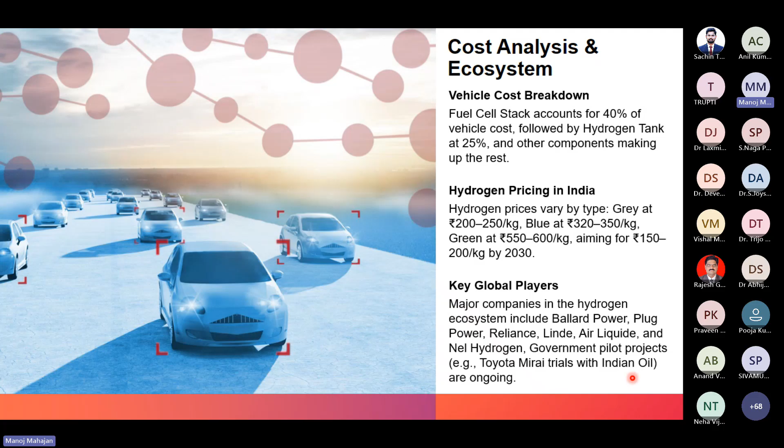Jobs - this is interesting. You see 6 lakhs plus opportunity, direct and indirect jobs creation across the hydrogen value chain. So in the entire ecosystem, 6 lakhs plus jobs will be available.

1 lakh crore plus annual fossil fuel import reduction expected by 2030, strengthening India's energy security and foreign exchange reserves. 15 to 20% estimated boost in manufacturing sector competitiveness from green hydrogen integration in energy intensive industries.

15 to 20% estimated boost in manufacturing sector competitiveness from green hydrogen integration in energy intensive industry.

3,000 megawatt annual electrolyzer manufacturing capacity allotted to 15 firms, creating high skill manufacturing jobs.

5,600 trainees have been certified in hydrogen-related skills through a coordinated workforce development program, supporting an 8 to 12 billion dollar export potential by 2030 through green hydrogen.

Three port-based hydrogen hubs have been established at Deendayal, V.O. Chidambaranar in Tamil Nadu, and Paradip ports, creating a regional economic corridor, with 8 lakh crore total investment expected in the hydrogen ecosystem.

So, as I said, a very huge amount is being invested for this development. By 2030, 5 million metric tons per year of green hydrogen production is targeted under the National Green Hydrogen Mission.

125 gigawatts of dedicated renewable energy capacity is planned. Heavy duty vehicle mobility demand is concentrated in strategic transport corridors, so heavy duty vehicles and port equipment will be the first adopters.

So India's green hydrogen production is projected to grow. Last time we also saw how much of a share will go to refineries, fertilizer, steel industry, mobility, and exports. So this is the projection.

Hydrogen trucks by 2030 will become mainstream with over 1,000 fueling stations planned. Advanced fuel cell technology efficiency will exceed 65% using platinum-free catalysts.

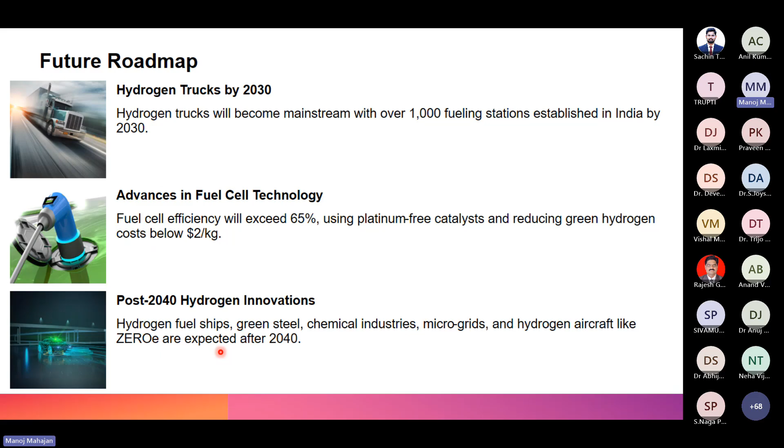This will help reduce green hydrogen cost to close to $2 per kg. Post-2040, hydrogen innovations like hydrogen fuel ships, green steel, chemical industry applications, microgrids, and hydrogen aircraft are expected to emerge.

In conclusion, a complementary mobility solution where hydrogen and electric vehicles work together forms a dual clean mobility strategy, with the ultimate aim of reducing emissions and improving sustainability.

Hydrogen is ideal for heavy duty applications, with more focus on long range for heavy duty vehicles, while electric vehicles are suitable for city commuting, urban and passenger travel.

Energy independence: hydrogen supports India's goal for energy independence, so we don't need to rely on imported fossil fuels like petrol and diesel.

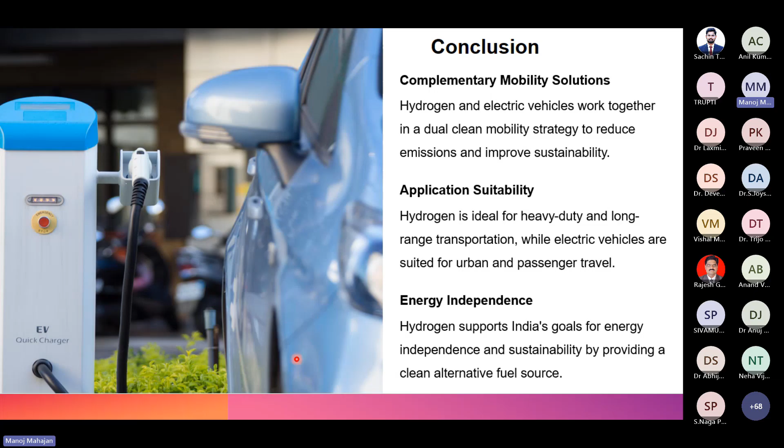This will make us self-dependent by providing a clean and green energy solution.